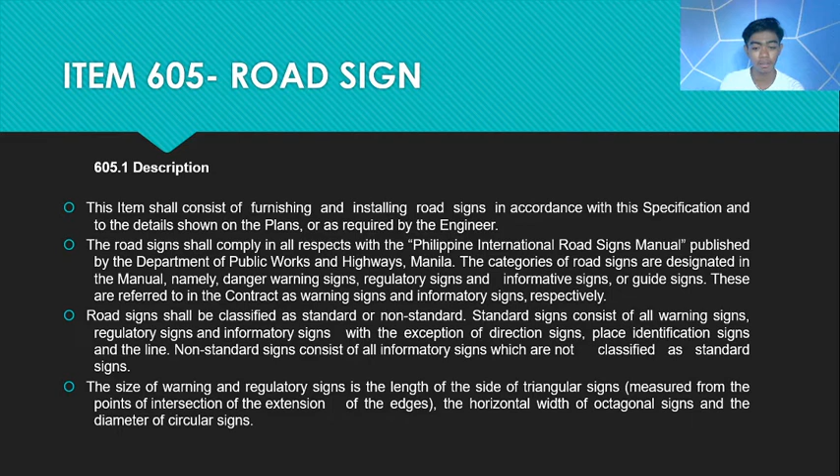Non-standard signs consist of all informatory signs which are not classified as standard signs. The size of warning and regulatory signs is the length of the side of triangular signs, measured from the points of intersection of the extension of the edges, the horizontal width of octagonal signs, and the diameter of circular signs.

605.2, materials requirement. 605.2.1, sign panels. Sign panels for warning, regulatory, and informatory signs shall be manufactured from aluminum sheeting at least 3 mm thick.

605.2.2, reflective sheeting. This reflective sheeting used in the road sign shall consist of a spherical lens element embedded within a transparent plastic having a smooth, flat surface with a protected precoat adhesive which shall be pressure sensitive for manual application.

Or tack free heat activated for mechanical vacuum heat application. The minimum reflective brightness values of the reflective sheeting as compared to a magnesium oxide shall be as given in table 605.1. The brightness of the reflective sheeting totally wet by rain shall be not less than 90% of the given values.

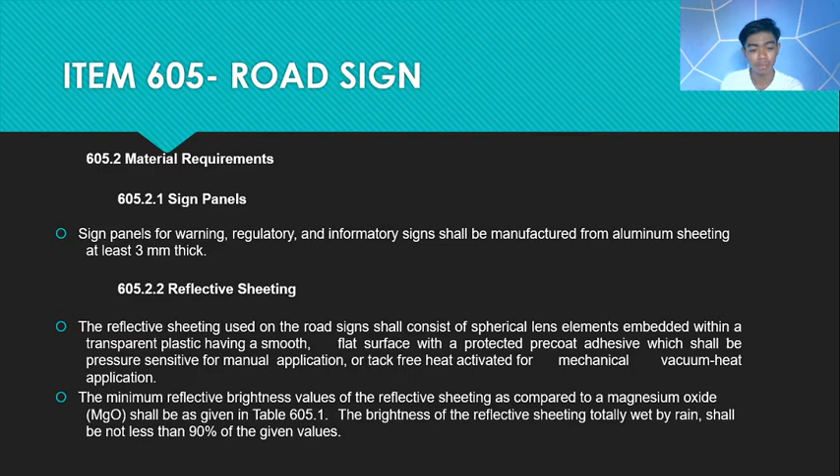It shall show no damage when bent 90 degrees over a 50 mm diameter mandrel. The sheeting shall be solvent resistant so as to be capable of withstanding cleaning with petrol, diesel fuel, mineral spirits, turpentine, methanol.

The sheeting shall show no cracking or reduction in flexibility or reflectivity after being subjected to the dropping of a 25 mm diameter steel ball from a height of 2 meters onto its surface.

The adhesive shall permit the reflective sheeting to adhere accurately 48 hours after application at temperatures up to 90 degrees.

The reflective materials shall be weather resistant and, following cleaning in accordance with manufacturer's recommendations, shall show no discoloration, cracking, blistering, peeling, or any dimensional changes.

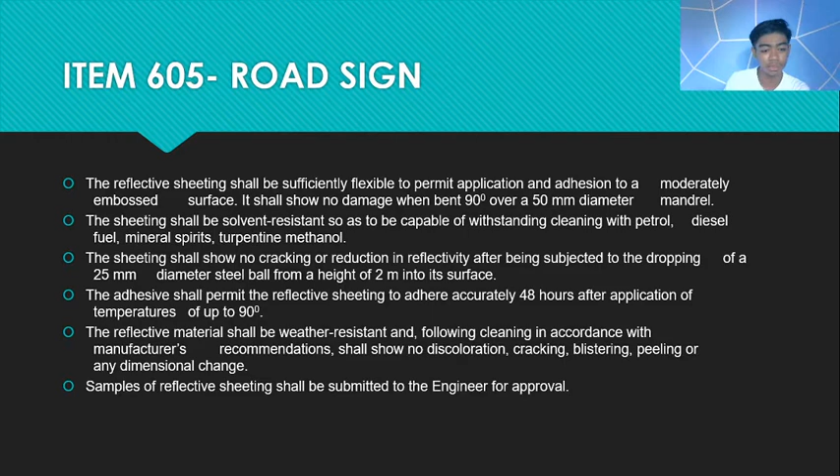Sample of reflective sheeting shall be submitted to the engineer for approval. 605.2.3, posts and frames. Wide flange posts and frames shall be fabricated from structural steel conforming to ASTM A283 grade D.

In lieu of wide flange steel posts, the contractor may use tubular steel posts conforming to ASTM A501. All posts shall be thoroughly cleaned, free from grease, scale, and rust.

And shall be given one coat of rust-inhibiting priming paint and two coats of gray paint in accordance with item 411, paint. 605.2.4, nuts and bolts. Nuts and bolts, washers, and other metal parts shall be hot dip galvanized after fabrication in accordance with the requirement of AASHTO M111.

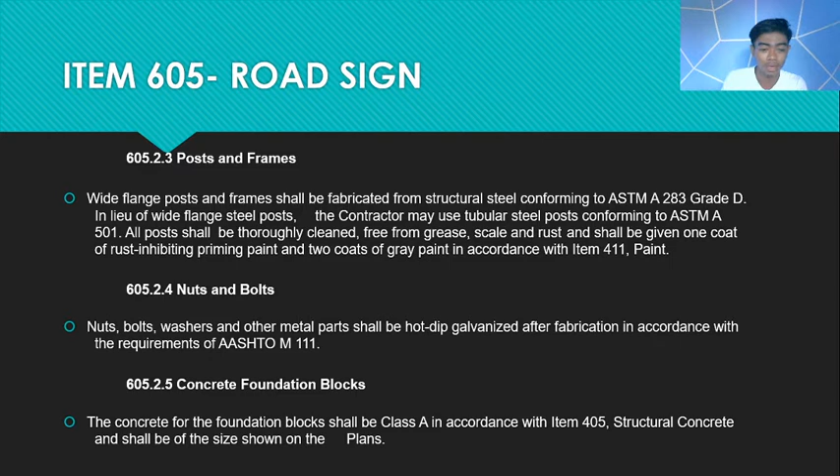605.2.5, concrete foundation blocks. The concrete for the foundation block shall be Class A in accordance with Item 405, structural concrete, and shall be of the size shown in the plans.

605.3, construction requirements. 605.3.1, excavation and backfilling. Holes shall be excavated to the required depth to the bottom of the concrete foundation as shown on the plans. Backfilling shall be carried out using suitable material approved by the engineer.

And shall be compacted in layers not exceeding 150 mm in depth. Surplus excavated material shall be disposed of by the contractor as directed by the engineer.

605.3.2, erection of post. The post shall be erected vertically in position inside the formwork of the foundation block prior to the placing of the concrete and shall be adequately supported by bracing to prevent movement of the post during the placing and setting of concrete.

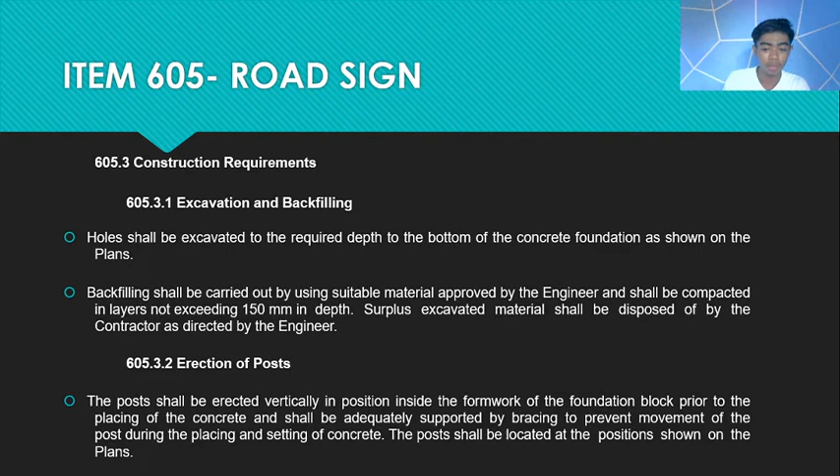The post shall be located at the position shown in the plans. 605.3.3, sign panels installation. Sign panels shall be installed in accordance with the details shown on the plans.

Any chipping or bending of the sign panels shall be considered sufficient cause for required replacement of the panels at the contractor's expense. The exposed portion of the fastening hardware on the face of the signs shall be painted with enamels matching the background color.

All newly erected traffic road signs shall be covered until ordered removed by the engineer.

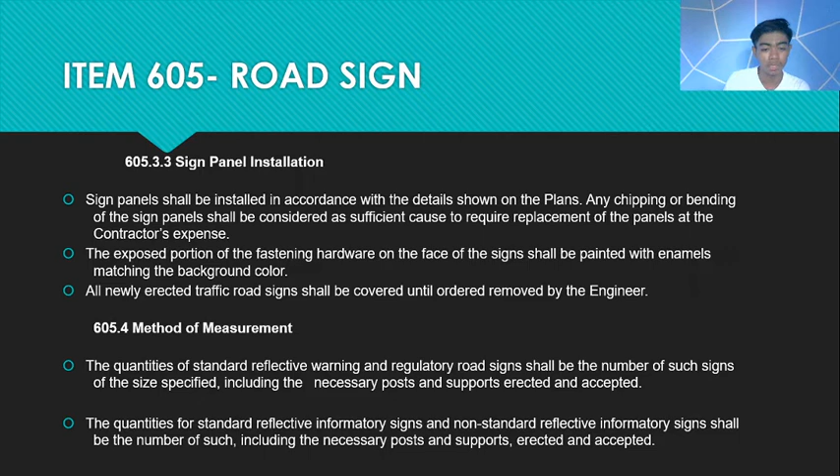605.4 Method of measurement. The quantity of standard reflective warning and regulatory signs shall be the number of such signs of the size specified, including the necessary posts and supports erected and accepted. The quantities for standard reflective informatory signs and non-standard reflective informatory signs shall be the number of such, including the necessary posts and supports erected and accepted.

605.5 Basis of payment. The quantities measured as determined in subsection 605.4 method of measurement shall be paid for at the contract unit price for the pay item shown in the bid schedule, which price and payment shall be full compensation for furnishing and installing road signs, for excavation, backfilling, and construction of foundation blocks, and all labor, equipment, tools, and incidentals necessary to complete the item.

Payment will be made under this table: pay item number 605.1, Warning signs, unit of measurement each. 605.2, Regulatory signs. 605.3, Informatory signs.

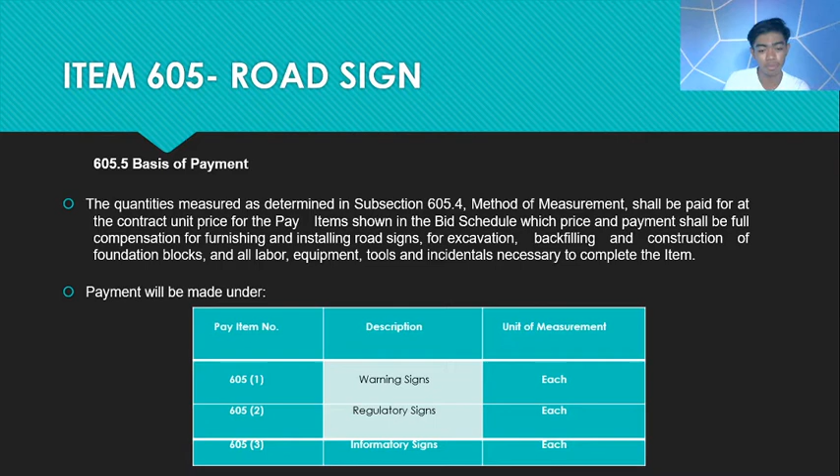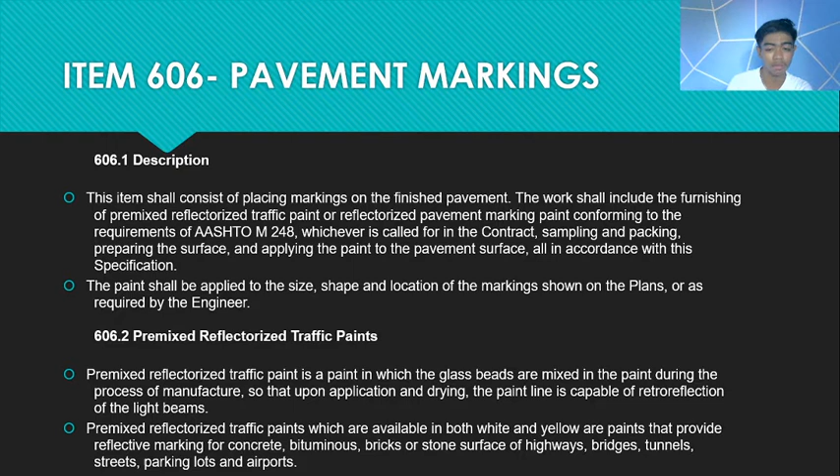606.2 Premixed reflectorized traffic paint. Premixed reflectorized traffic paint is a paint in which the glass beads are mixed in the paint during the process of manufacture, so that upon application and drying, the paint line is capable of retroreflection of light beams. Premixed reflectorized traffic paints, available in both white and yellow, provide reflective markings for concrete, bituminous, bricks, or stone surfaces of highways, bridges, tunnels, streets, parking lots, and airports.

606.2.1 Classification. Premixed reflectorized traffic paint shall be classified according to the following types based on the vehicle used: Type 1, alkyd. Type 2, chlorinated rubber alkyd.

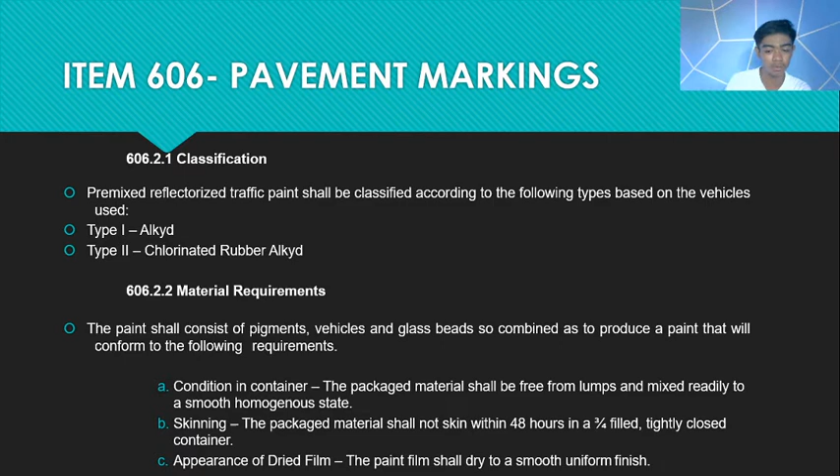606.2.2 Materials Requirement. The paint shall consist of pigments, vehicle, and glass beads combined so as to produce a paint that will conform to the following requirements. A. Condition in container: the packaged material shall be free from lumps and mix readily to a smooth homogeneous state. Skinning: the packaged material shall not skin within 48 hours in a three-quarter filled, tightly closed container. Appearance of dried film: the paint film shall dry to a smooth, uniform finish. D. Flexibility: the dried paint film shall not show cracking or flaking after being bent about 180 degrees over a 12.7 mm mandrel. E. Resistance to water: the dried paint film shall not show blistering, peeling, wrinkling, or discoloration when immersed in water for 18 hours.

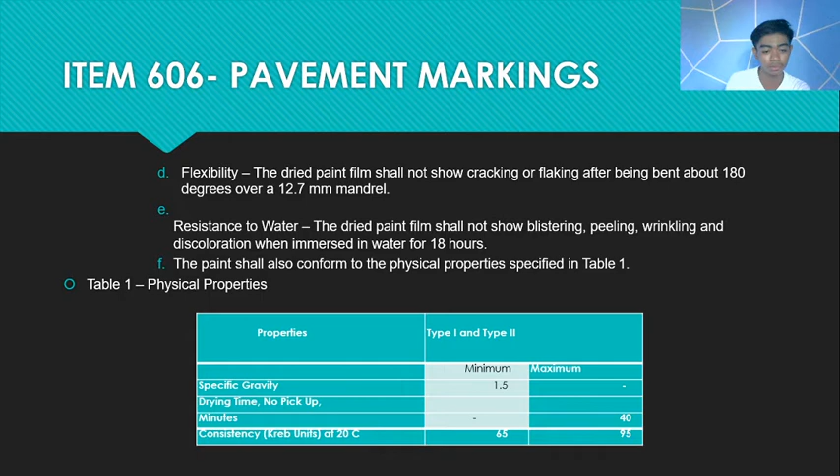The paint shall also conform to the physical properties specified in Table 1, physical properties. The properties are specific gravity, drying time (no pickup, in minutes), and consistency (Krebs units at 20 degrees Celsius). For Type 1 and Type 2, there is a minimum for specific gravity and consistency, and a maximum in minutes for drying time and in consistency.

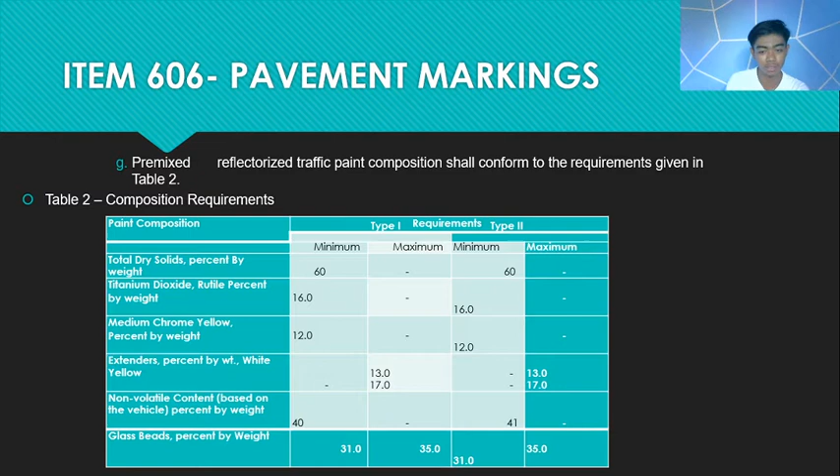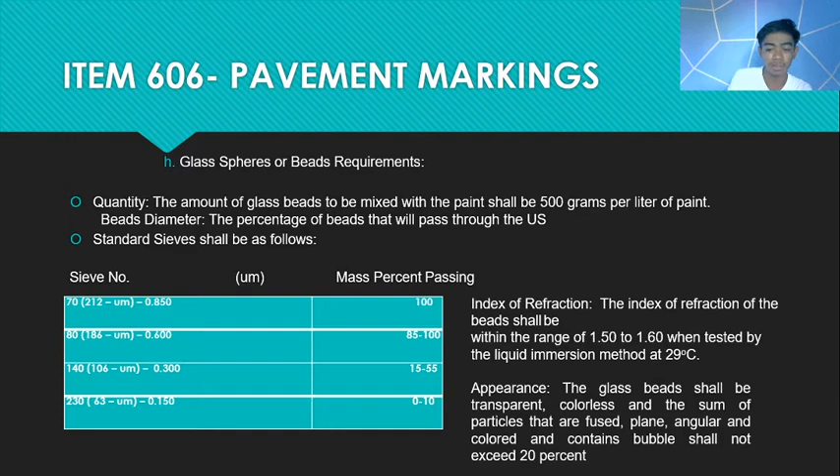Sieve numbers 70, 80, 140, and 230, with mass percent passing equal to 100, 85 to 100, 15 to 55, and 0 to 10 respectively. Index of refraction: the index of refraction of the bead shall be within the range of 1.5 to 1.6, tested by the liquid immersion method at 29 degrees Celsius. Appearance: the glass beads shall be transparent, colorless, and the sum of particles that are fused, plane, angular, and colored, and contain bubbles, shall not exceed 20%.

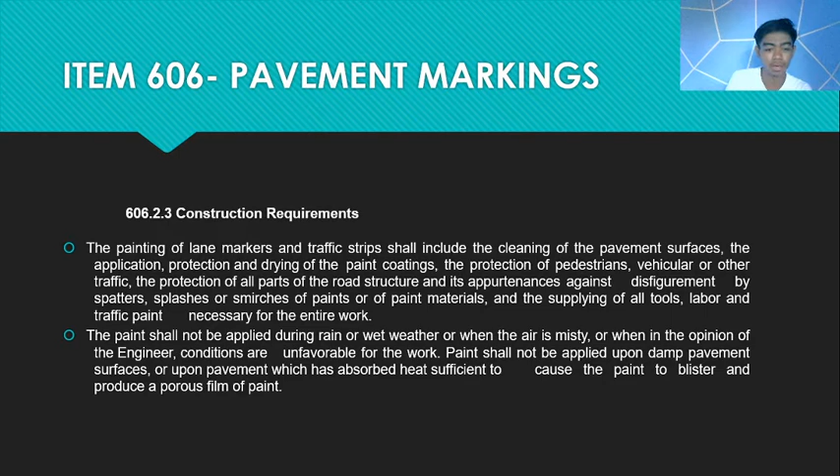The paint shall not be applied during rain or wet weather, or when the air is misty, or when in the opinion of the engineer conditions are unfavorable for the work. Paint shall not be applied upon a damp pavement surface or upon pavement which has absorbed heat sufficient to cause the paint to blister and produce a porous film of paint.

The application of paint shall preferably be carried out by a machine specially made for the purpose, but where brushes are used, only round or oval brushes not exceeding 100 mm in width will be permitted. The paint shall be so applied as to produce a uniform, even coating in close contact with the surface being painted. Traffic paint shall be applied to the pavement at the rate of 0.33 liter per square meter and shall dry sufficiently to be free of tracking in from 15 to 30 minutes.

All marking shall present a clean cut, uniform, and workmanlike appearance. Marking which fails to have a uniform, satisfactory appearance either by day or night shall be corrected by the contractor in a manner acceptable to the engineer and at no cost to the government.

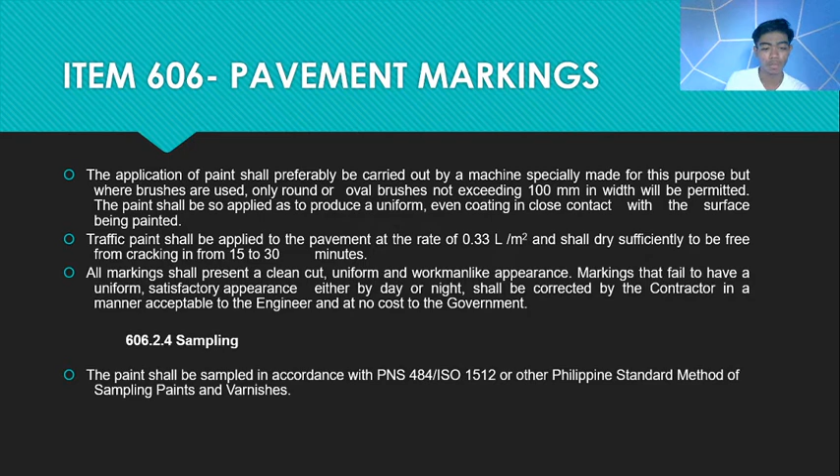606.2.4 Sampling. The paint shall be sampled in accordance with PNS 484, ISO 1512, or other Philippine standard method of sampling paints and varnishes.

606.2.5 Test methods. The paint shall be tested in accordance with the method specified in PNS 461 or other Philippine standard method of test for paints and varnishes.

606.2.6 Packing, packaging, and marking. The paint shall be packed, packaged, and marked in accordance with PNS 140.

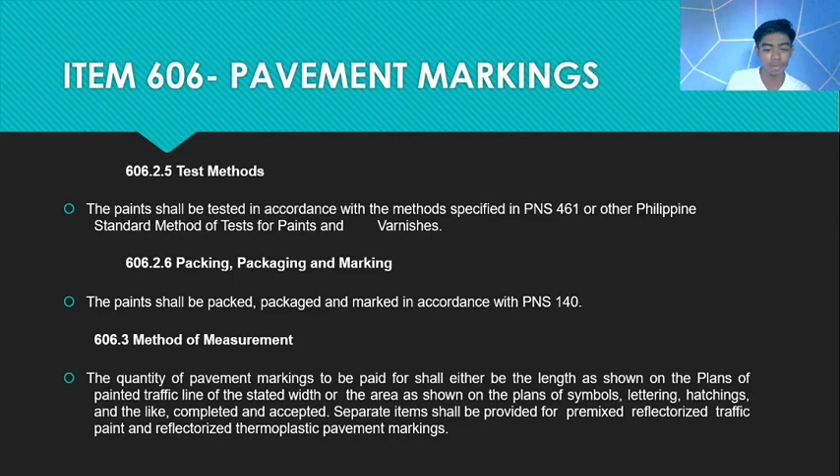606.4 Basis of payment. The quantities measured as determined in section 606.4, method of measurement, shall be paid for at the appropriate contract unit price for the pay item shown in the bid schedule, which price shall consist of full compensation for furnishing and placing all materials, sampling and packing for the preparation of the surface, and for all labor, equipment, tools, and incidentals necessary to complete the item.

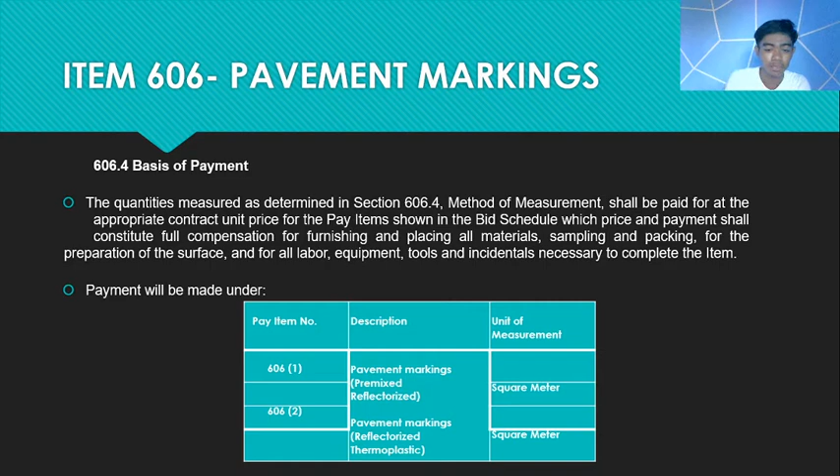Payment will be made under 606, 606.1 and 2. Pavement marking, premix reflectorized, unit of measurement, square meter per square meter.

Item 607, reflective pavement studs. 607.1 Description. This item shall consist of furnishing and installing reflective pavement studs on the surface of the pavement in accordance with the specification and the location shown on the plans or as required by the engineer.

607.2 Materials requirements. 607.2.1 Reflective studs. Reflective studs shall be either the flush surface or raised profile type having the following characteristics.

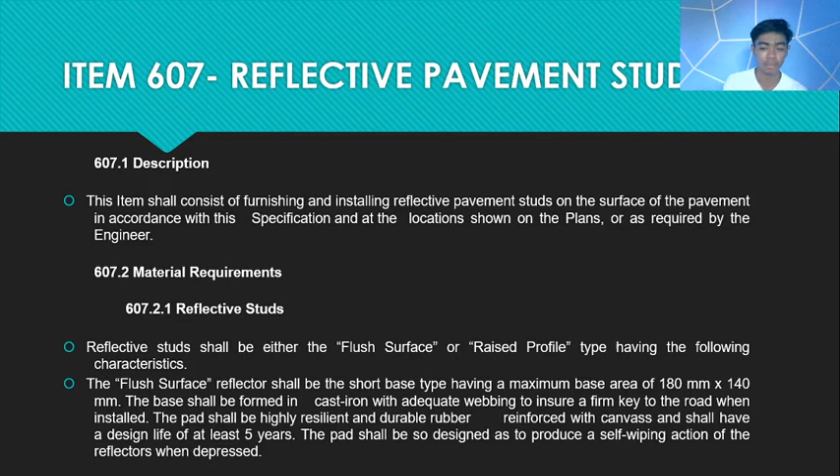The flush surface reflector shall be a short base type having a maximum base area of 180 mm by 140 mm. The base shall be formed in cast iron with adequate webbing to ensure a firm key to the road when installed. The pad shall be highly resilient and durable rubber, reinforced with canvas, and shall have a design life of at least 5 years. The pad shall be designed so as to produce a self-wiping action of the reflectors when depressed. The reflector shall be made of impact and abrasion-resistant glass and shall be hermetically sealed into a copper socket.

The raised profile reflector shall consist of an acrylic plastic shell filled with an adherent epoxy compound, molded from methyl methacrylate, into the shape of a shallow frustum of a pyramid with base dimension approximately 100 mm by 100 mm, thickness of not more than 20 mm. The shell shall contain two prismatic reflectors, each inclined at an angle of 30 degrees to the horizontal and having an area not less than 20 cm squared.

The reflector shall attain the following standard of photometric and physical properties. A. The reflector shall have minimum specific intensity values, expressed as candle power per foot candle of illumination at the reflector on a plane perpendicular to the incident light, shown in table 607.1.

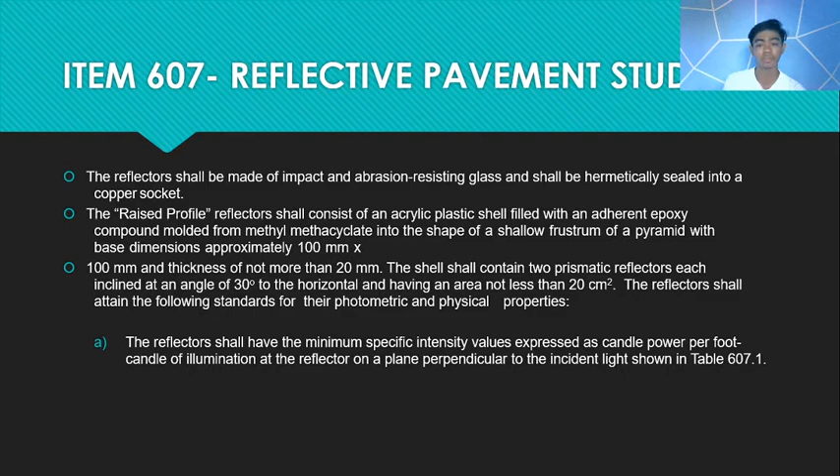Each reflector for testing shall be located with the center of the reflecting face at a diameter of 1.5 meters from a uniformly bright light source having an effective diameter of 5 mm. The width of the photocell shall be 1.2 mm and shall be shielded from stray light. The distance from the centers of the light source and photocell shall be 5 mm.

Failure of more than 4% of the reflective faces shall be cause for rejection of the complete batch.

The reflector shall support a vertical load of 10 kN when tested in the following manner. A reflector shall be centered horizontally over the open end of a vertical, hollow metal cylinder, 75 mm internal diameter, 25 mm high, with a wall thickness of 6 mm. The load shall be applied to the top of the reflector through a 6 mm diameter by 6 mm high metal plug centered on top of the reflector.

Failure shall constitute either breakage or significant deformation of the marker at a load less than 1000 kgf.

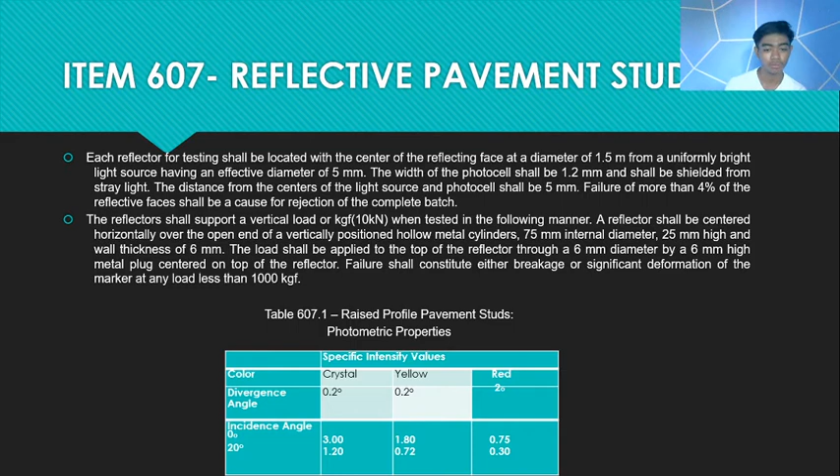Table 607.1, Raised profile pavement studs photometric properties. So this is table 607.1.

607.2.2 Adhesive. Where raised profile type reflectors are specified, an approved two-part epoxy adhesive shall be used.

607.2.3 Cement mortar. Cement mortar shall consist of 1 part Portland cement to 2 parts fine aggregate, with water added as necessary to obtain the required consistency.

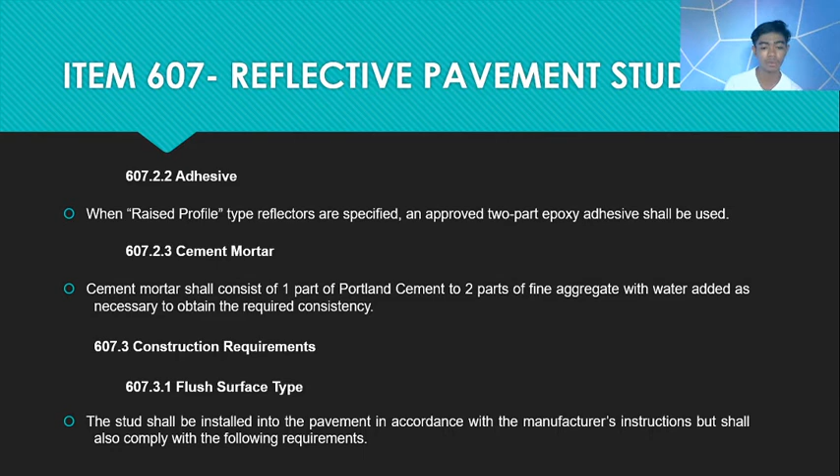607.3 Construction requirements. 607.3.1 Flush surface type. The stud shall be installed into the pavement in accordance with the manufacturer's instructions but shall also comply with the following requirements. Cavities in the pavement shall be clearly cut to the dimension of the pavement studs and shall allow a clearance of 10 mm around the stud base.

The longitudinal centerline axis of the cavity shall be the same as required for the pavement stud when laid to the correct line of direction. The wall of the cavity shall be splayed back at an angle of approximately 30 degrees to the vertical to facilitate a dovetail joint after the mortar has set.

The bottom of the cavity shall be leveled with asphalt concrete prior to placing the stud base, which shall be pounded into position with a pounder foot attached to a pneumatic drill.

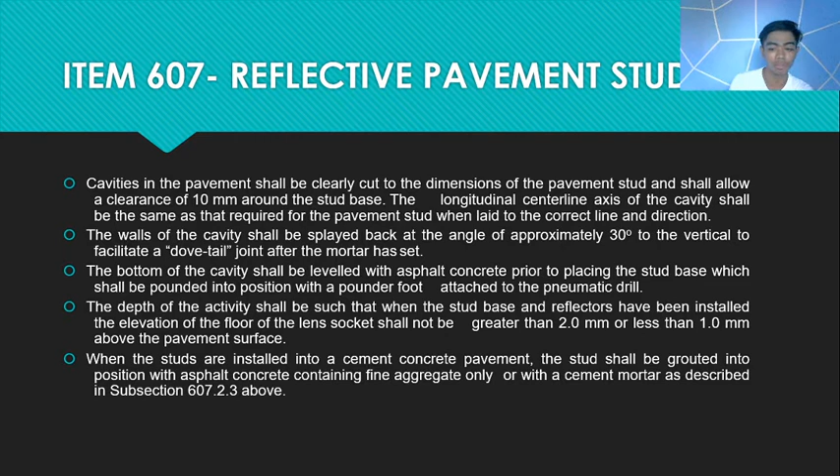The depth of the cavity shall be such that when the stud base and reflectors have been installed, the elevation of the floor of the lens socket shall not be greater than 2.0 mm or less than 1.0 mm above the pavement surface. When the studs are installed into a cement concrete pavement, the stud shall be grouted into position with asphalt concrete containing fine aggregate only, or with cement mortar as described in subsection 607.2.3 above.

607.3.2 Raised profile type. The pavement stud shall be installed in accordance with the manufacturer's instructions.

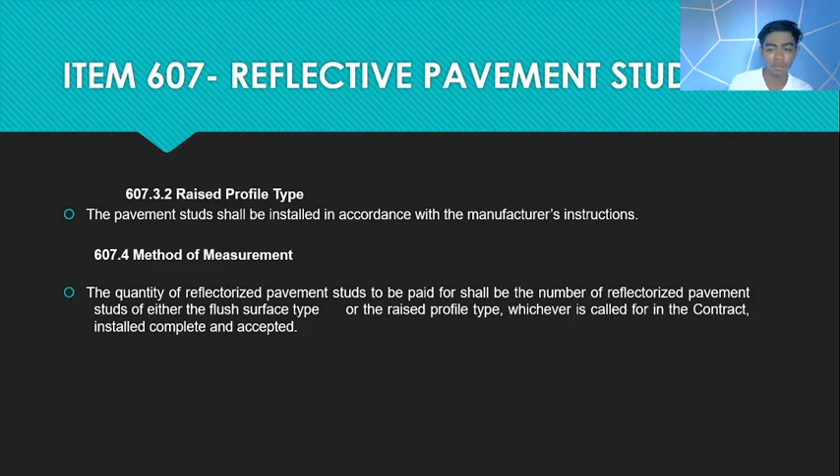607.4 Method of measurement. The quantity of reflectorized pavement studs to be paid for shall be the number of reflectorized pavement studs of either the flush surface type or the raised profile type, whichever is called for in the contract, installed, complete, and accepted.

607.5 Basis of payment. The quantities measured as described in subsection 607.4, Method of measurement, shall be paid at the contract unit price of the pay item shown in the bid schedule, which payment shall constitute full compensation for furnishing and placing all materials, excavating cavities, preparation of surfaces, applying adhesive and mortar, and for all labor, equipment, tools, and incidentals necessary to complete the item.

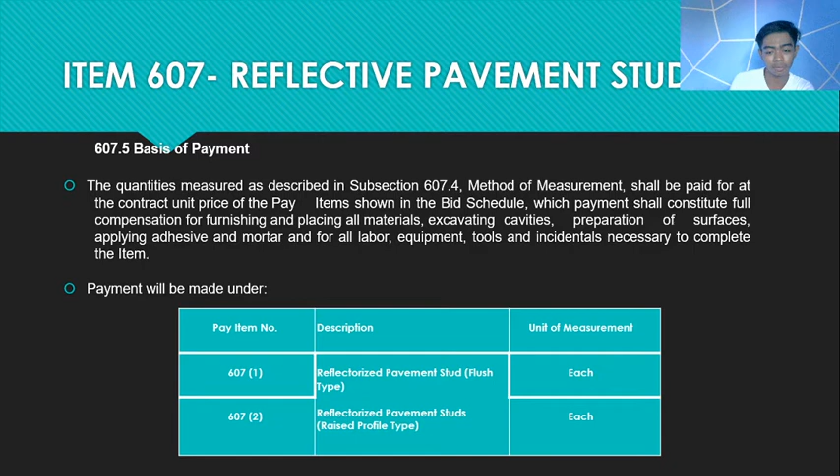Payment will be made under 607 (1), 607 (2): Reflectorized pavement stud, flush, or pavement stud, raised profile type. Each.

Item 608, Topsoil. 608.1 Description. This item shall consist of topsoil furnished, transported and spread, or topsoil removed from a designated area, hauled and spread in accordance with the specification at the location shown in the plans or as required by the engineer.

608.2 Materials requirement. Topsoil furnished shall consist of fertile, friable soil of loamy character without admixtures of undesirable subsoil, refuse, or foreign materials. It shall be obtained from well-drained, arable land and shall be reasonably free from roots.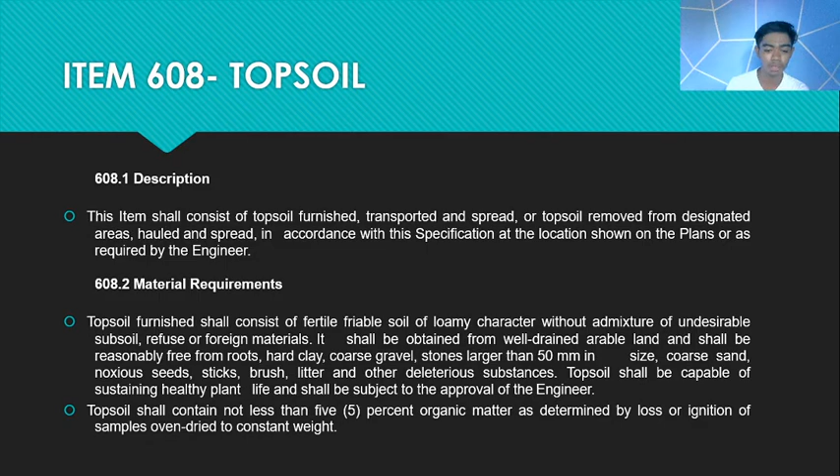Hard clay, coarse gravel, stone larger than 50 mm in size, coarse sand, noxious seed, stick, brush, litter, and other deleterious substances shall be excluded. Topsoil shall be capable of sustaining healthy plant life and shall be subject to the approval of the engineer. Topsoil shall contain not less than 5% organic matter as determined by loss on ignition of samples oven dried to constant weight.

608.3 Construction requirements. 608.3.1 Source of material. Topsoil shall be obtained as specified in Item 102 excavation or from other approved sources.

The contractor shall notify the engineer at least 5 days before he intends to start topsoil stripping operations. After inspection and approval by the engineer, and prior to stripping any topsoil, the contractor shall remove noxious weeds and tall grass roots, and stone larger than 50 mm in diameter.

608.3.2 Placing. The topsoil shall be evenly spread on the areas and to the line and level shown on the plans, and compacted with a light roller to a depth of not less than 100 mm.

Spreading shall not be done when the topsoil is excessively wet or otherwise in a condition detrimental to such work. The roadway surface shall be kept clean during hauling and spreading operations.

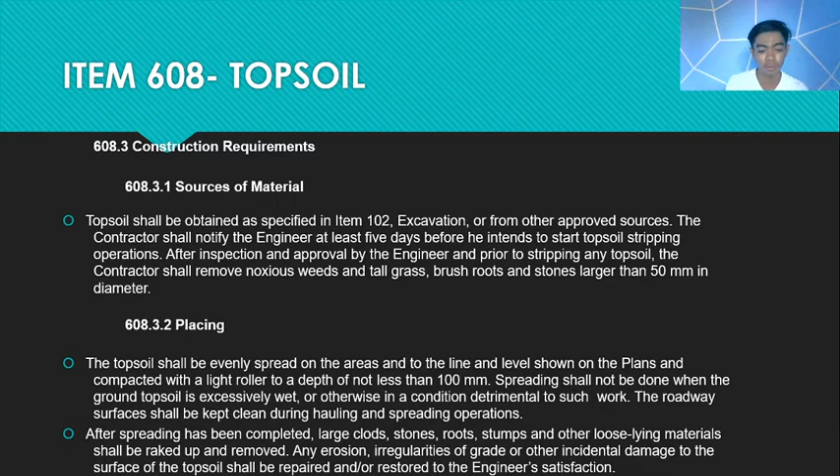After spreading has been completed, large clods, stone, roots, stumps, and other loose-lying material shall be raked up and removed. Any erosion, irregularities of grade, or other incidental damage to the surface of the topsoil shall be repaired and/or restored to the engineer's satisfaction.

608.4 Method of measurement. The quantities to be paid for shall be the number of cubic meters of topsoil removed, furnished and hauled, completed in place, and accepted.

608.5 Basis of payment. The quantities as determined in subsection 608.4, method of measurement, shall be paid for at the contract unit price respectively for each of the particular pay items listed below that is shown in the bid schedule, which price and payment shall be full compensation for furnishing and placing all materials, and for labor, equipment, tools, and incidentals necessary to complete the item.

Payment will be made under 608.1, 608.2, furnishing and placing topsoil, and placing of topsoil, per cubic meter.

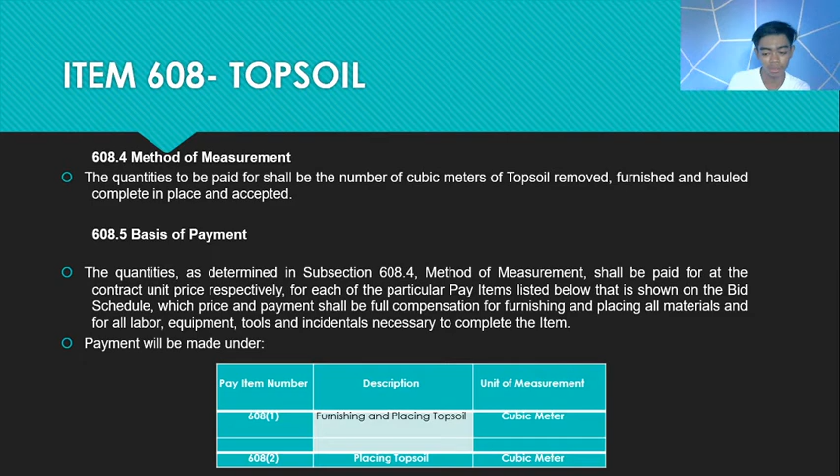Item 609, Sprigging. 609.1 Description. This item shall consist of planting sprigs of living grass plants in accordance with the specification and location shown in the plans, or as required by the engineer.

609.2 Materials required. 609.2.1 Sprigs. Sprigs shall be healthy living stems, stolons, or rhizomes with attached roots of perennial turf-forming grass of the kind shown on the plans.

Harvested without adhering soil and obtained from approved sources in the locality of the work where the sod is heavy and thick matted. The presence of objectionable grass, weeds, or other detrimental material will be cause for rejection.

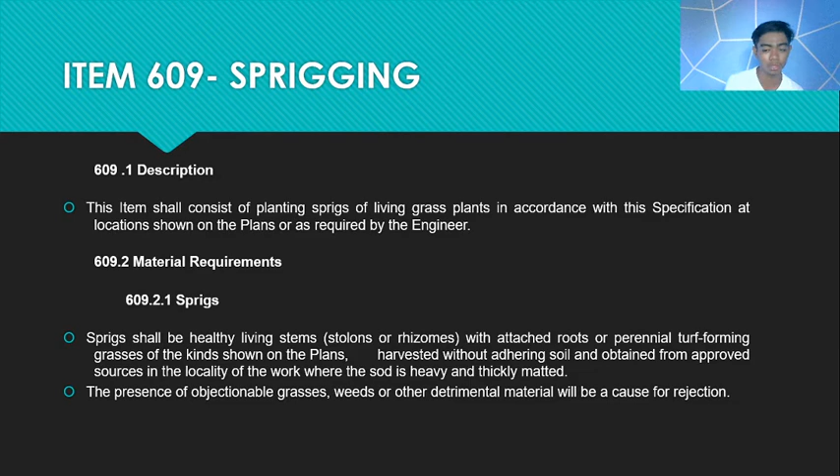609.2.2 Fertilizers. Fertilizers shall be standard commercial fertilizers supplied separately or in mixture, containing the percentage of total nitrogen, available phosphoric acid, and water-soluble potash.

These shall be furnished in standard containers with name, weight, and guaranteed analysis of contents clearly marked. The fertilizers may be supplied in the following form: a dry, free-flowing fertilizer soluble in water, suitable for application by common fertilizer spreader.

A finely ground fertilizer soluble in water, suitable for application by power sprayer; or a granular or pellet form suitable for application by blower equipment.

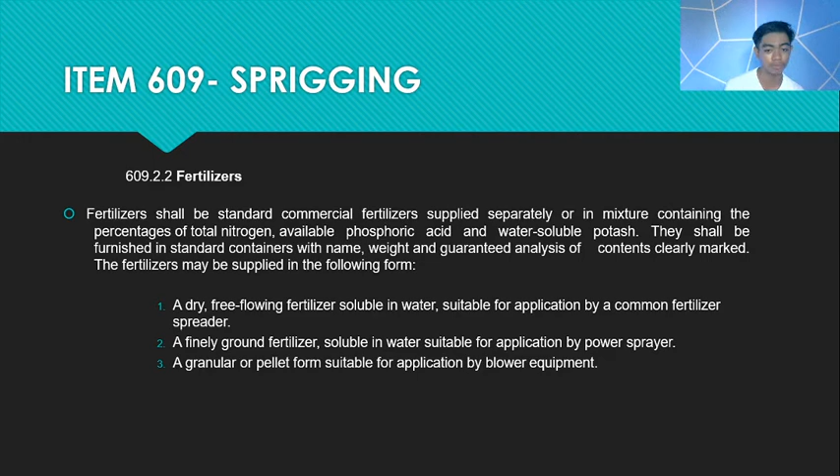609.2.3 Ground limestone. Ground limestone shall contain not less than 85% of calcium and magnesium carbonates, and shall be of such fineness that 100% shall pass through a 2.00 mm sieve, and not less than 35% through a 0.150 mm sieve.

Granulated slag may be substituted in lieu of ground limestone, subject to the approval of the engineer, at an adjusted application rate that will provide the equivalent total neutralizing power of the specified limestone.

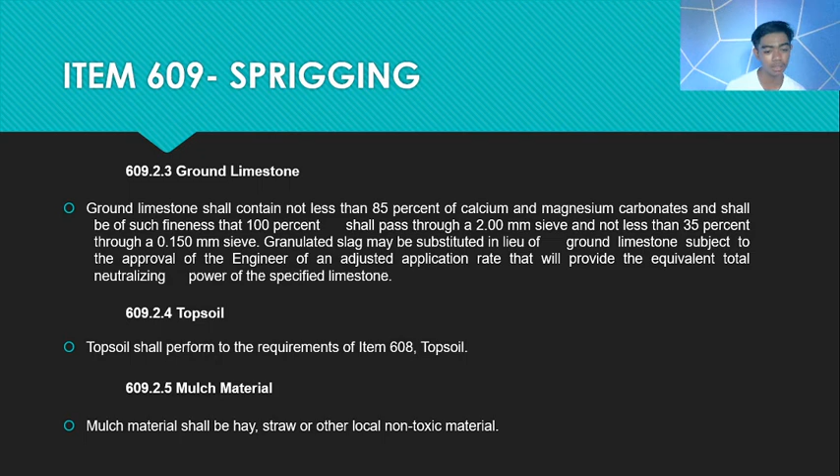609.2.4 Topsoil. Topsoil shall conform to the requirements of Item 608, Topsoil. 609.2.5 Mulch material. Mulch material shall be hay, straw, or other local non-toxic material.

609.3 Construction requirements. 609.3.1 Harvesting sprigs. The contractor shall notify the engineer at least 5 days before sprigs are to be harvested, and the source shall be approved by the engineer before harvesting begins.

To begin harvesting, grass and sod shall be mowed to a height of 50 to 75 mm, and all clippings removed.

Sprigs shall then be loosened by cross-disking, shallow plowing, or other acceptable methods. After loosening the sprigs from the soil, they shall be gathered in small piles or windrows, watered, and kept moist until planted.

Not more than 24 hours shall elapse between harvesting and planting sprigs, except that when weather or other uncontrollable conditions interrupt the work, a time extension may be granted, provided the sprigs are still moist and viable.

Sprigs that have heated in stockpiles, been permitted to dry out, or otherwise seriously damaged during harvesting or delivery shall be rejected and disposed of as directed.

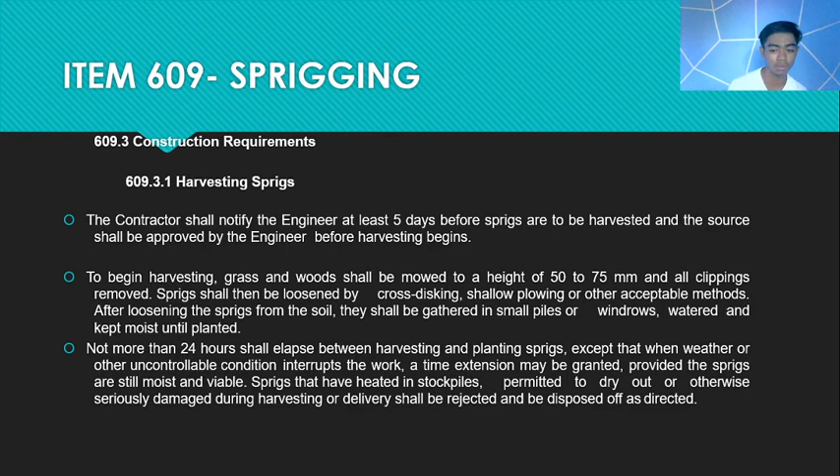609.3.2 Advanced preparation and cleanup. After grading of areas has been completed and before applying fertilizer and ground limestone, areas to be sprigged shall be raked or otherwise cleared of stone larger than 50 mm in diameter, sticks, stumps, and other debris which might interfere with sprigging, growth of grass, or subsequent maintenance of grass-covered area.

If any damage by erosion or other cause has occurred after grading of areas and before beginning the application of fertilizer and ground limestone, the contractor shall repair such damage. This may include filling gullies, smoothing irregularities, and repairing other incidental damage.

609.3.3 Topsoiling. If topsoiling is shown on the plans, it shall be done in accordance with the requirement of item 608 topsoil.

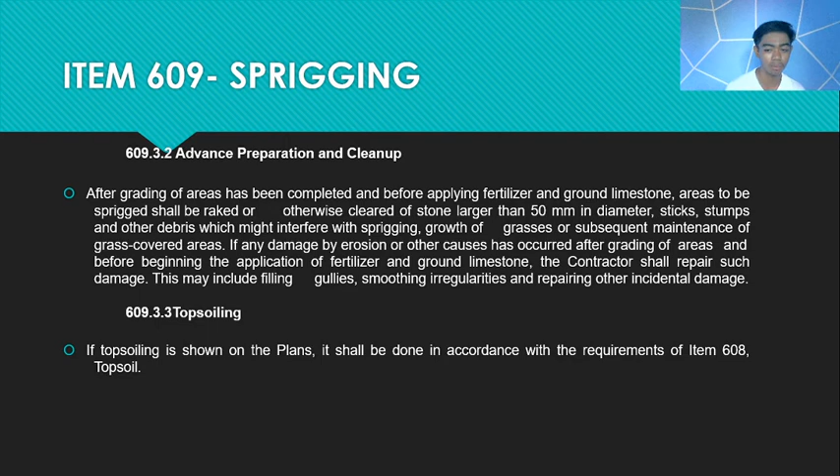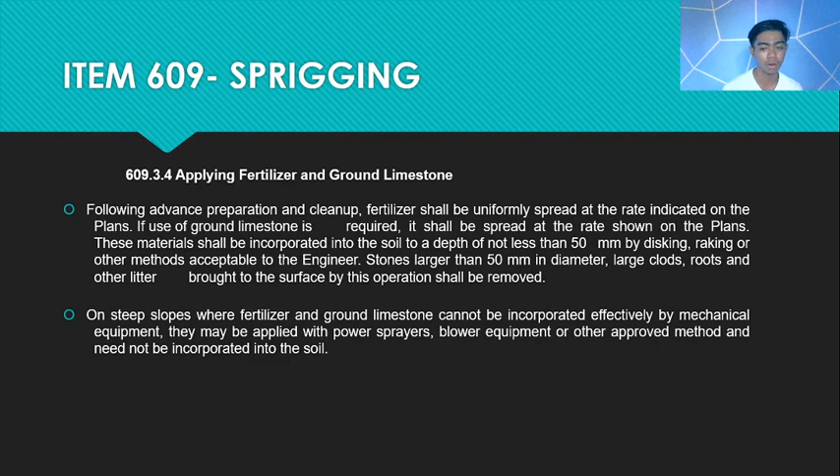Stones larger than 50 mm in diameter, large clods, roots, and other litter brought to the surface by this operation shall be removed. On steep slopes where fertilizer and ground limestone cannot be incorporated effectively by mechanical equipment, they may be applied with power sprayers, blower equipment, or other approved method and need not be incorporated into the soil.

609.3.5 Planting sprigs. Sprigging shall not be done during windy weather or when the ground is dry, excessively wet, or otherwise untillable. Sprigs shall be planted in existing ground or in formed embankments or on topsoil as shown in the plans. If the soil is not moist when the sprigs are being set, water shall be applied until soil is moist and in workable condition.

One or more of the following methods shall be used, whichever is directed by the engineer. Broadcast sprigging: sprigs shall be broadcast by hand or by suitable equipment in a uniform layer over the prepared surface with spacing between sprigs not to exceed 150 mm. The sprigs shall then be forced into the soil to a depth of 50 mm to 100 mm with a straight spade or similar tool, or with a disc, harrow, or other equipment set to cover the sprigs to the required depth.

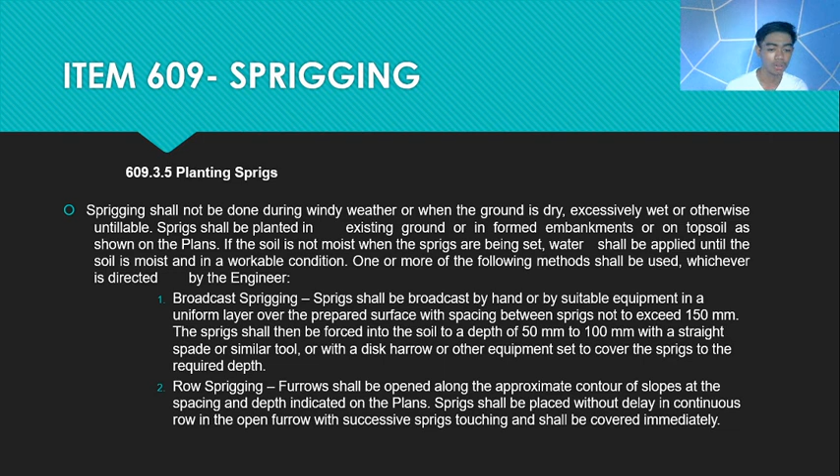Row sprigging: furrows shall be opened along the approximate contour of slopes at the spacing and depth indicated on the plans. Sprigs shall be placed without delay in continuous row in the open furrow, with successive sprigs touching, and shall be covered immediately.

Spot sprigging shall be performed as specified under row sprigging, except that instead of planting in continuous rows, a group of 4 sprigs or more shall be spaced 450 mm apart in the row.

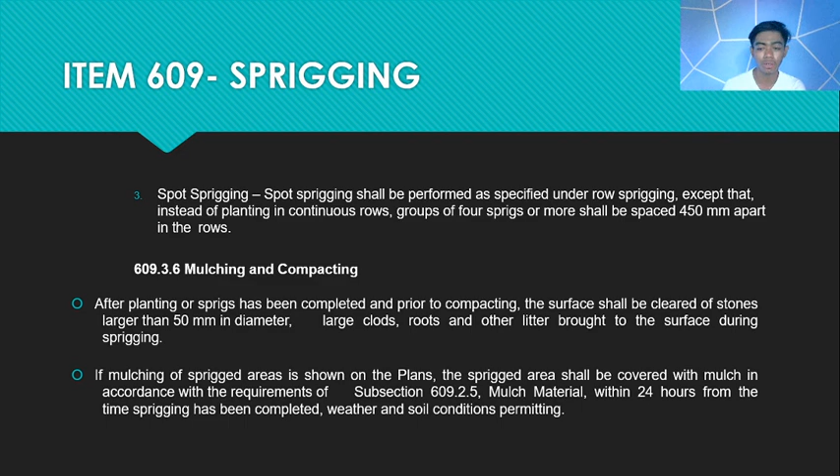609.3.6 Mulching and compacting. After planting of sprigs has been completed and prior to compacting, the surface shall be cleared of stone larger than 50 mm diameter, large clods, roots, and other litter brought to the surface during sprigging. If mulching of sprigged areas is shown on the plans, the sprigged area shall be covered with mulch in accordance with the requirements of subsection 609.2.5 mulch material within 24 hours from the time sprigging has been completed, weather and soil conditions permitting.

If mulching is not shown on the plans, the sprigged area shall be compacted within 24 hours from the time sprigging has been completed, weather and soil conditions permitting, by cultipackers, rollers, or other satisfactory equipment operated at right angles to the slope. Compaction shall not be done when the soil is in such condition that it is picked up by equipment, nor shall clay soil be compacted if so directed by the engineer.

609.3.7 Maintenance of sprigged areas. The contractor shall protect sprig area against traffic by warning signs or barricades approved by the engineer. Surface gullied or otherwise damaged following sprigging shall be repaired by regrading and sprigging as directed. The contractor shall mow, water as directed and otherwise maintain sprigging areas in satisfactory condition until final inspection and acceptance of the work.

609.4 Method of measurement. The quantity of sprigging to be paid shall be the number of units of 100 square meters measured on the ground surface completed and accepted.

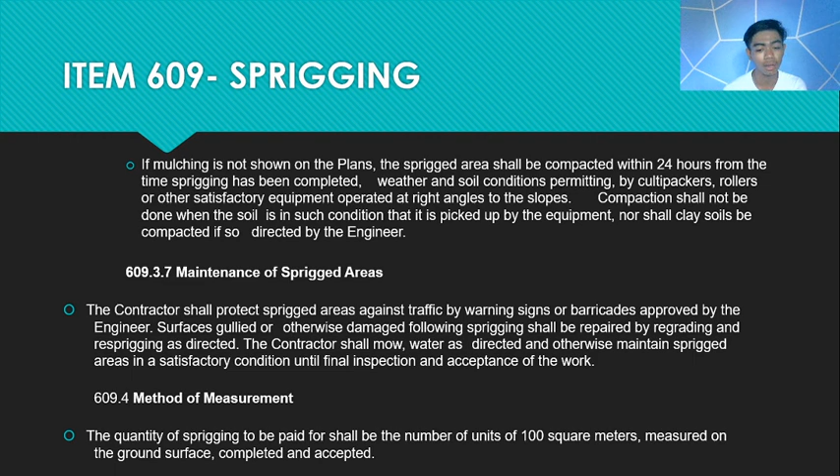609.5 Basis of payment. The quantity determined as provided in subsection 609.4 method of measurement shall be paid for at the pay item listed below, which price and payment shall be full compensation for furnishing and placing all materials, for any required mulching and sprigging areas, and for all labor, equipment, tools, and other incidentals necessary to complete the work prescribed in the section.

Except topsoiling, which shall be paid for as provided in item 608 topsoil. Pay item will be made under 609 sprigging per 100 square meter.